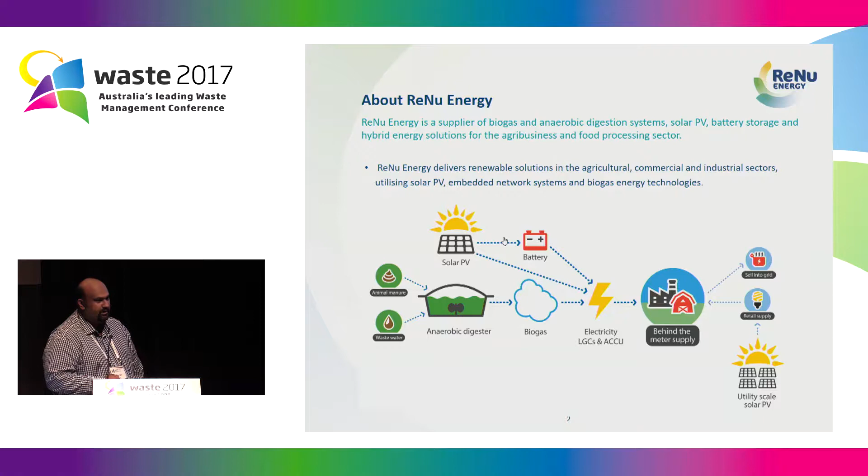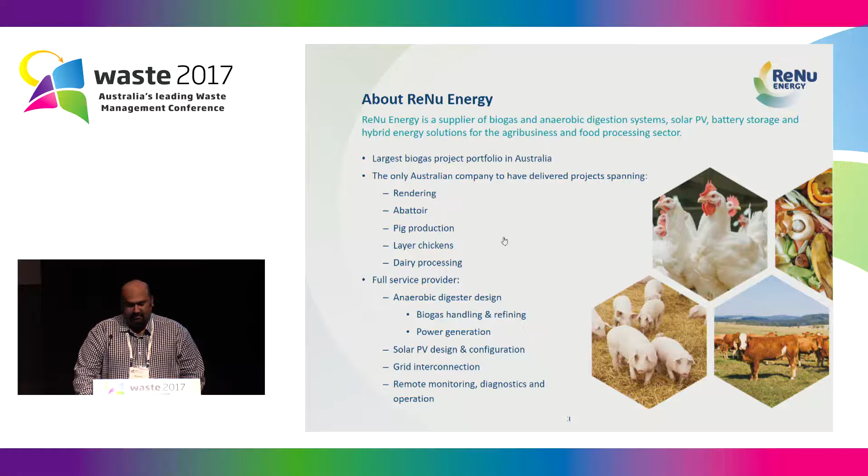A bit more about ReNu Energy. We've completed a number of projects across Australia, totaling about 13 projects now in biogas. We're the only company to have done biogas projects in rendering, abattoirs, pig production, layer chickens and dairies. Full service provider when it comes to anaerobic digestion. We do our own anaerobic digester design, as well as biogas handling and refining of the gas and producing electricity. Grid interconnection, remote monitoring, as well as operations and maintenance of the facility.

With our build, own, operate model, we have been able to transform the company and speed up investment in this sector with no upfront cost to our end client, where we're on their facility, we take their feedstock, we produce energy from it and sell the energy back to the client. So no capital cost to the client at the end of the day, because investment in this sector has been lacking, especially in the food and agri sector, because we're not adding to their production capability as such. So we're at the back end of their food processing facilities.

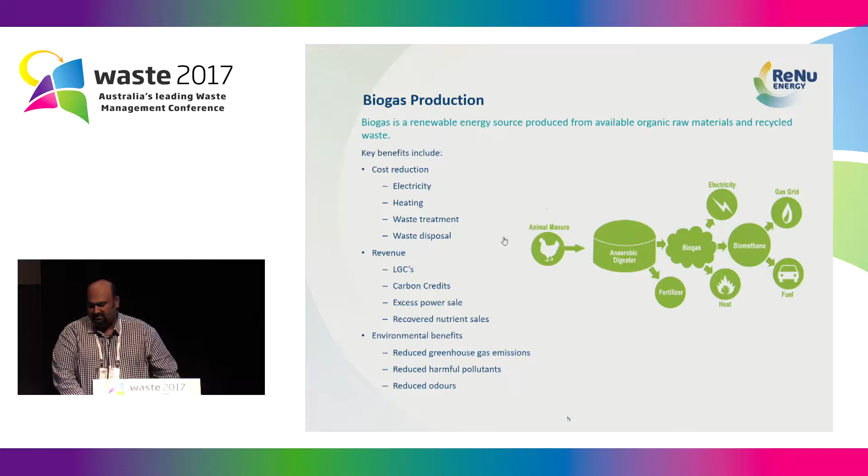But the benefits that the business actually gets is reduced energy costs for them, better sustainability credentials, and obviously reduced carbon emissions. So key sectors that we have is heating and electricity, with wastewater treatment and waste disposal. The revenue streams are from LGCs and carbon credits, and obviously there's recovered nutrients as well that can be on-sold as well. The environmental benefits are a reduction in greenhouse gases and harmful pollutants and reduced odours as well.

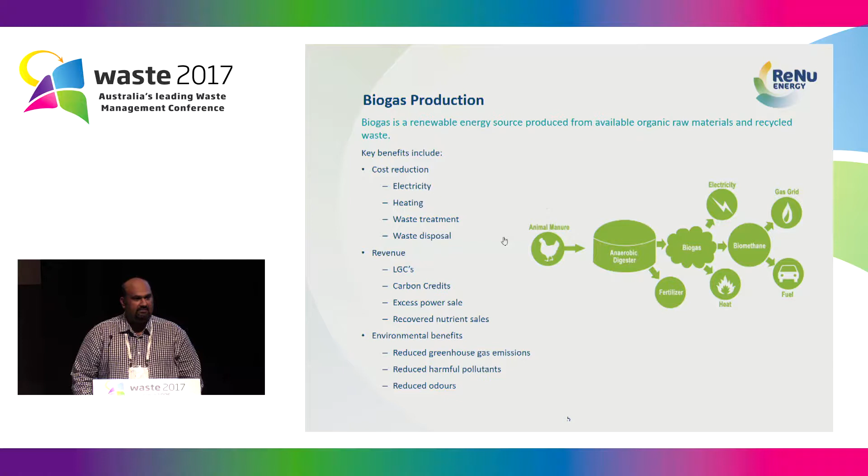Anaerobic digestion is a well-known technology where it's completely done in the absence of oxygen, so no odours actually are emitted from this process. We actually are reducing the odour footprint of any facility we're at. So this is a typical representation of our covered anaerobic lagoons. It's a very large pond, completely sealed with wastewater or effluent underneath.

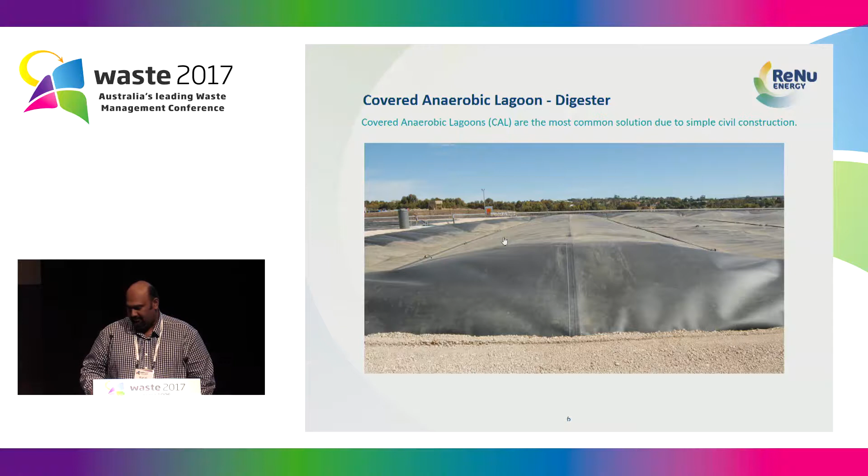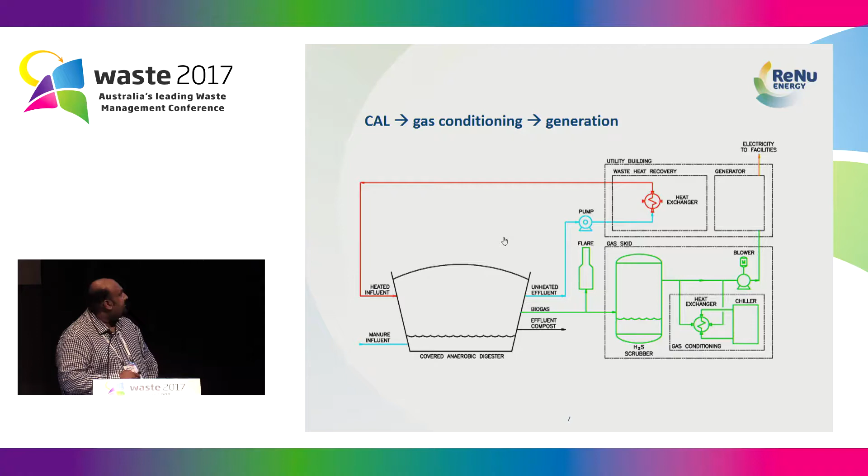In the absence of oxygen, bacteria will break down all organic matter and produce biogas, which has a component of methane, which we further treat through our gas conditioning system and burn in a reciprocating generator that produces electricity. We also heat our effluent in most cases to ensure that anaerobic digestion is kept at our optimum temperature. So we have waste heat coming from the generators that we put back into the digester to maintain this temperature.

So the most exciting thing that we're here to talk about for this sector for us is our Goulburn bioenergy project, which ARENA is co-funding. So we will be commencing construction for this project towards the end of this month. We've sorted pretty much all the council approvals and construction certificates. So we've entered into an agreement with ARENA. ARENA is co-funding $2.1 million of a total build in excess of a $5 million project. So ReNu Energy will own and operate this project and sell electricity behind the meter to Southern Meats at Goulburn.

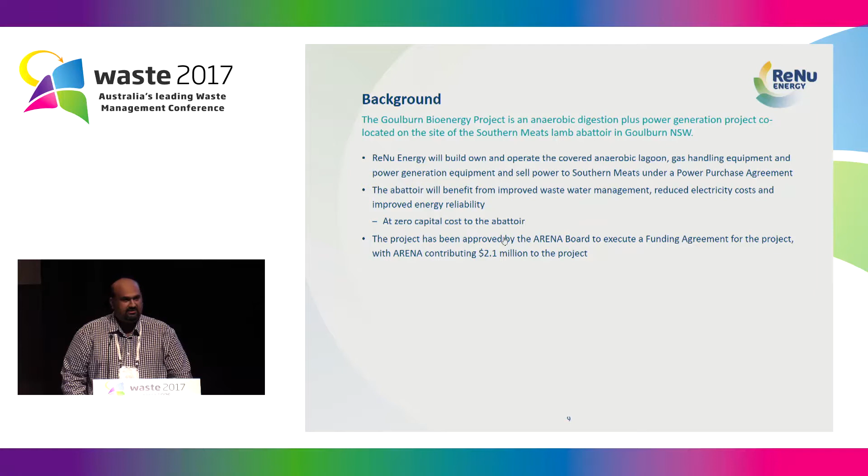What the project looks like: Southern Meats at Goulburn is a sheep abattoir which kills about 4,000 sheep a day. A five-day a week operation produces about 1 million litres of wastewater a day. We take that into our covered anaerobic lagoon, which you saw a representation of earlier. They use about 20,000 kilowatt hours a day in terms of electricity, and about 9,000 gigajoules of natural gas per month to produce steam for their facility.

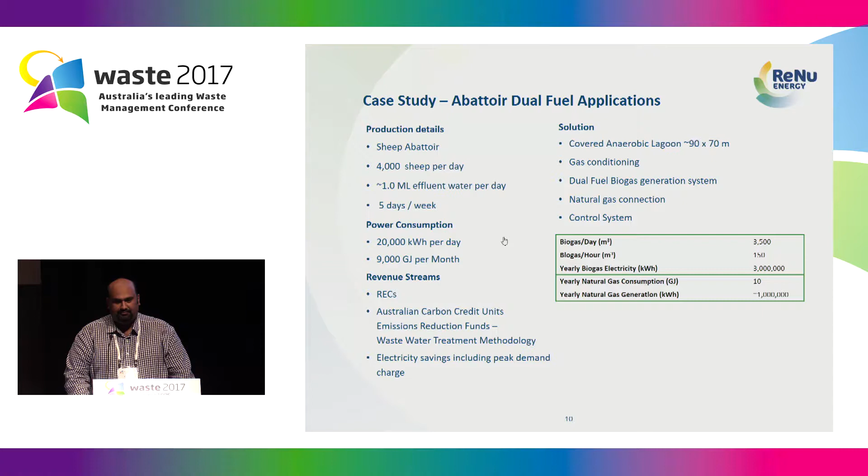So the solution is we're building a covered anaerobic lagoon about 90 meters by 70 meters, about 8 meters deep. We're putting in dual fuel biogas generation systems. Why dual fuel? I'll show that to you a bit later. There is a natural gas connection that we're tapping into as well. We will be able to produce about 3 million kilowatt hours from biogas alone for the facility, which will be used during peak and shoulder periods. So why these periods? So the abattoir starts processing about 4 in the morning.

That's when operations ramp up, but they're still in off-peak electricity. If you understand the electricity or energy markets, there's peak, shoulder and off-peak. During off-peak, the tariff is a third of what the tariff usually is in peak and shoulder periods. So during this period in red, electricity is very, very expensive for the abattoir to buy.

So what we're doing is storing biogas underneath the cover to only run generators during peak and shoulder periods when the cost of electricity is at its highest. The cost of electricity here is a third compared to the cost of electricity over here, so it's 3 times as much. So it makes good economic sense for us to be operating in those high electricity periods.

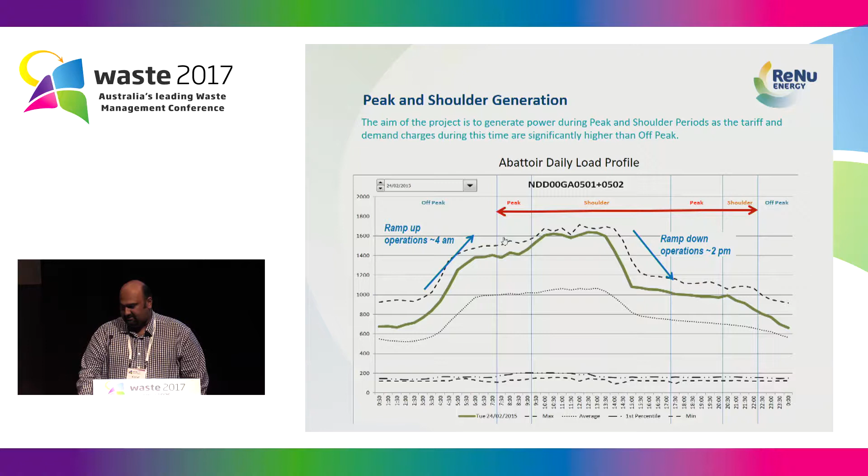With biogas, we've only got a sufficient amount to produce electricity in these red parts here. With the way their electricity demand works and how much electricity they use during production, that profile actually looks like this. This is them ramping up production, this is their peak time of production, and it comes down slowly at the end of the day, and this is what their profile looks like for the entire week. So we've only got enough biogas to produce electricity for these shaded parts, so we needed to supplement

biogas with natural gas. As we already have the infrastructure on site, it just made sense to supplement the biogas with a little bit of natural gas, not a whole heap, but just to get these green parts out of the way. So during their peak and shoulder periods throughout the entire day between 7 a.m. and 7 p.m., Southern Meats at Goulburn will not be drawing any energy from the grid whatsoever. They'll be self-sufficient with on-site generation from Monday to Friday.

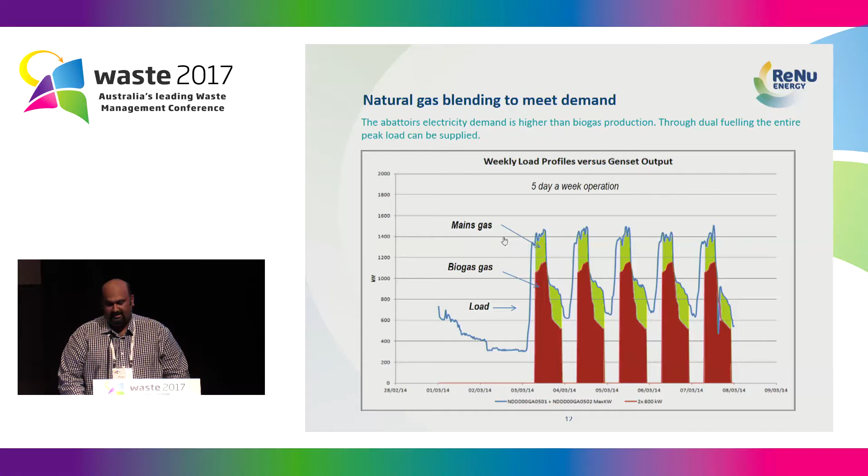That's what we're hoping to achieve, and we will achieve that through the complex control system that we have on site. It will be a net positive from on-site generation.

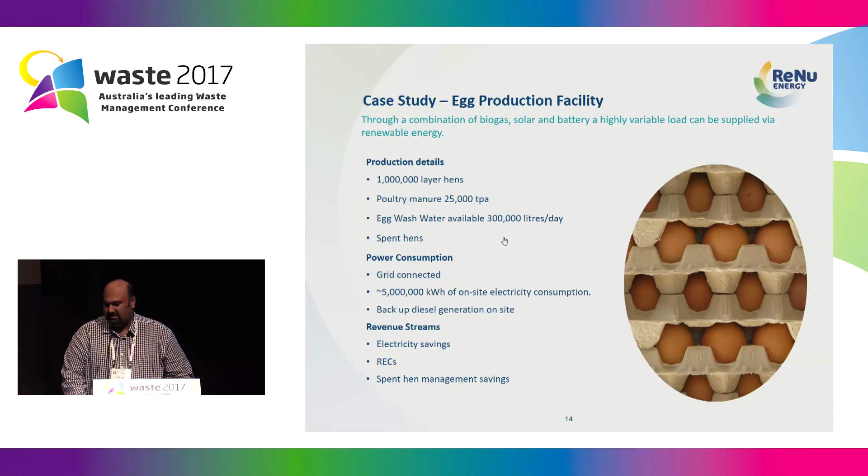We have another egg layer production facility case study that we're hoping to work towards, and this represents what we can do when we combine renewable energies together to provide a full-blown solution to our end user clients. This facility has 1 million egg layers, so there is wastewater available from the egg washing process. There are different daily profiles, and that's what makes this concept very challenging. In winter there's a different energy usage profile compared to summer.

In summer months it's a lot hotter and the birds need to remain cool, so they've got the evaporative cooling systems going at full tack, trying to control the temperature in the sheds, otherwise the hens will start dying off. And that's the difference in the energy profile you see in winter versus summer. So how can we achieve that? There's no point producing electricity if it can't be used effectively on site behind the meter.

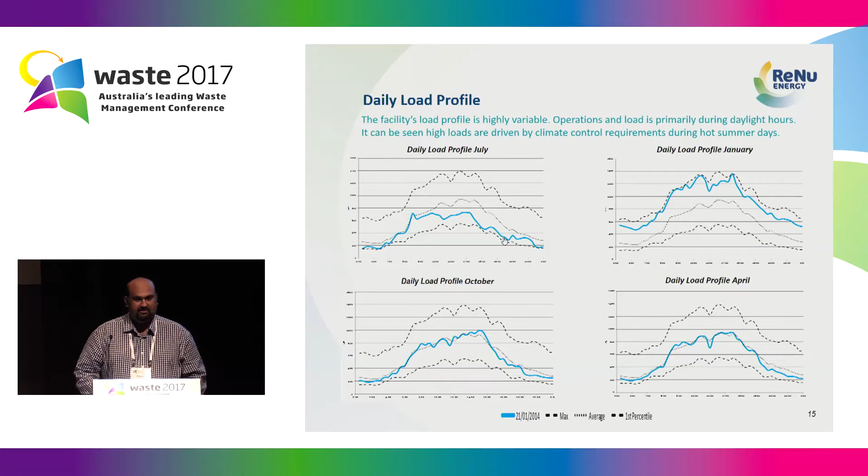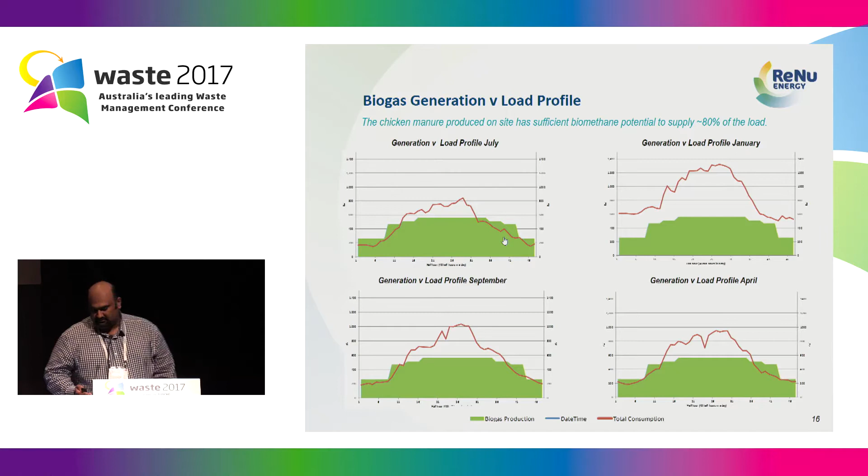So this is what we can generate with biogas in green during the 4 seasons. But as you can see, the energy usage on site is much higher than what we can produce. So that's where solar and battery come in. With solar, battery and biogas, we can produce a system that meets more than 90% of the facility's electricity demand.

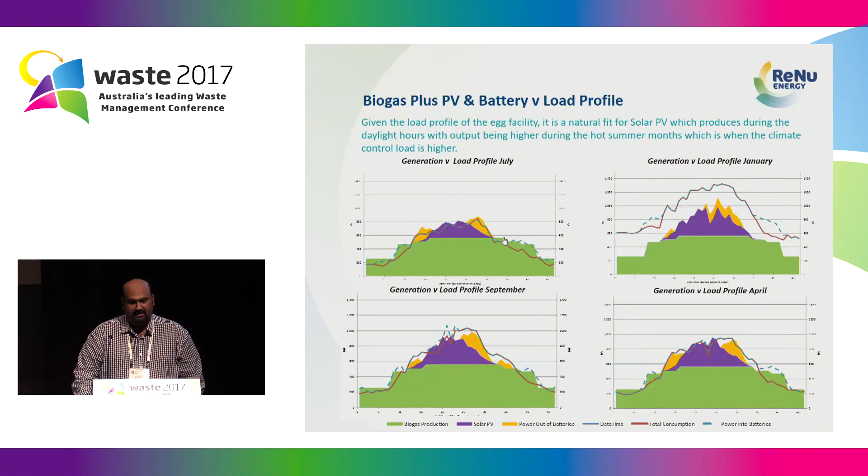And in some parts in winter, we're actually exporting, or we've got surplus electricity. In summer we have a deficit of electricity, but in winter we've got a surplus. So those things offset each other to produce the best financial position for a renewable energy system for this client.

And in South Australia, you would have heard there's a fair bit of issues with energy, and we're talking to this client that already has 2 covered anaerobic lagoons to convert them from being used as a gas source to electricity generation. And obviously the most exciting thing for us is starting this project at Goulburn at Southern Meats.

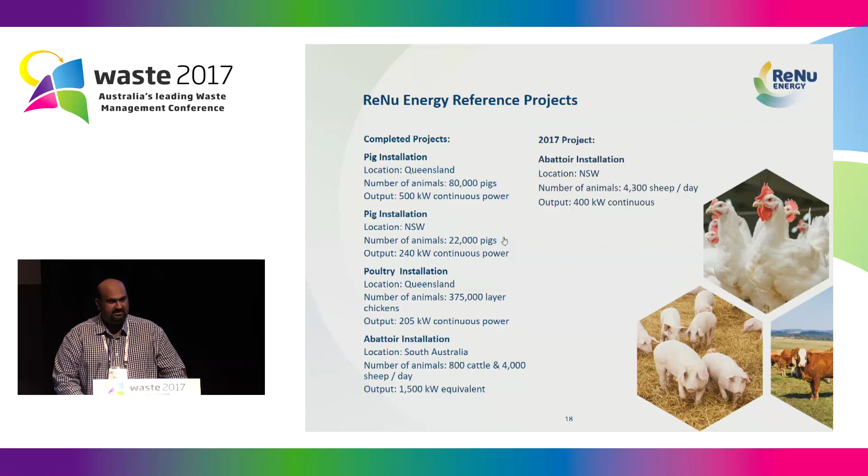So with that, I'll conclude my presentation. If there are any questions.